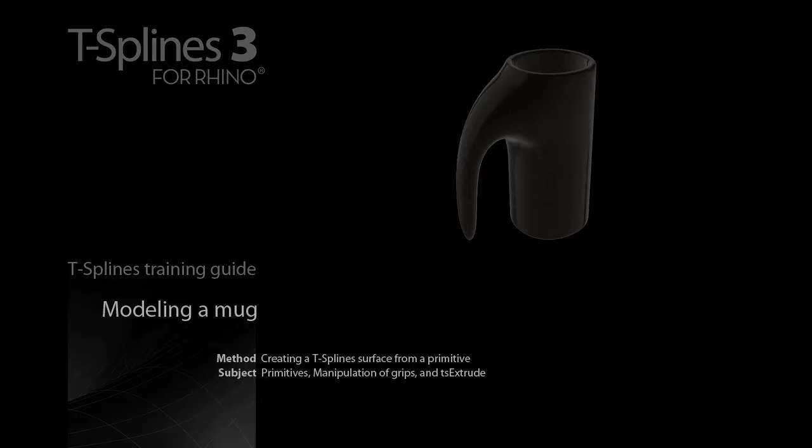Exercise 2, Modeling a Mug. In this exercise, we will again start with the T-Splines primitive to model a mug. We'll introduce one new command, the Extrude command. In this exercise, we are not starting with a reference image. We are going to treat T-Splines like digital clay to create and explore a shape.

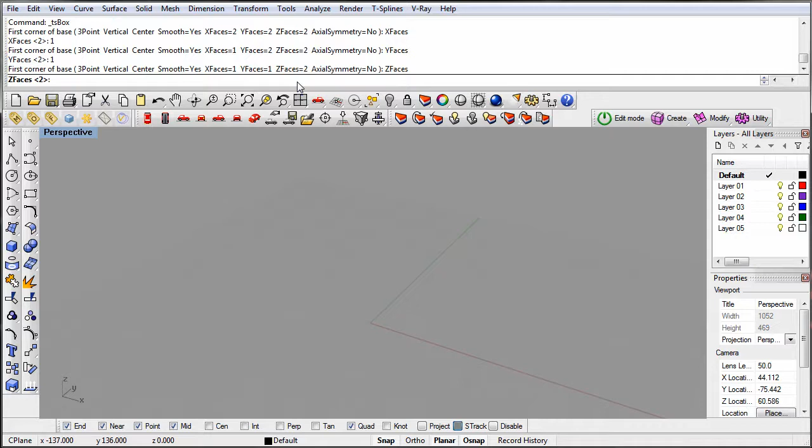We'll make a mug. We'll start again with the box primitive. Since the mug should be round, we don't need much detail in the X and Y directions, and we'll make one face on each of these. In the Z direction, we'll make 5 faces, and we will not use any symmetry.

With the remote control model, our primitive got us about 70% of the way there. It was roughly the same final shape as our design. We're not that far along with this mug. In this case, we need to make fairly substantial changes to our model to make the mug hollow and add a handle. We need to make large changes to the shape of the model. The Extrude command is a powerful basic tool.

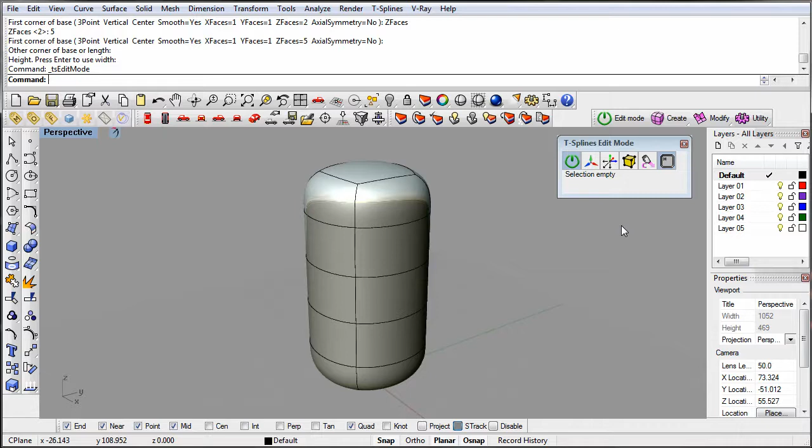We'll start by using the Extrude command to make the mug hollow. You can extrude faces, edges, and curves. We'll be extruding faces here. Just select the faces to extrude and run the Extrude command by clicking the icon or selecting from the drop-down menu. In exercise 1, we talked about the importance of the topology of your model when working with T-Splines. Again, the topology is the layout of the faces, edges, and vertices.

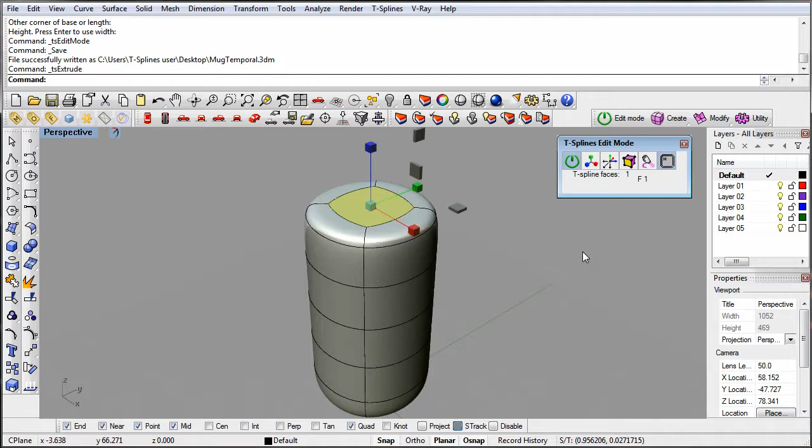We need to have a ring of faces to represent the thickness of the mug. So after we extrude, we are going to scale the new face inwards. This has the effect of making the outer ring of faces fatter. Next, we'll extrude the center face again. This time, we will move it downwards.

You can see that the farther we pull it, the more it looks stretched out. So we'll just pull it a bit and then run the Extrude command again. By doing this a couple of times, it helps the surface not seem stretched out and pointy. Looking back at the top of the mug, here we have a ring of faces that gives the mug the right thickness. This was because we made the original extrusion and scaled it in before making extrusions and pulling it inwards.

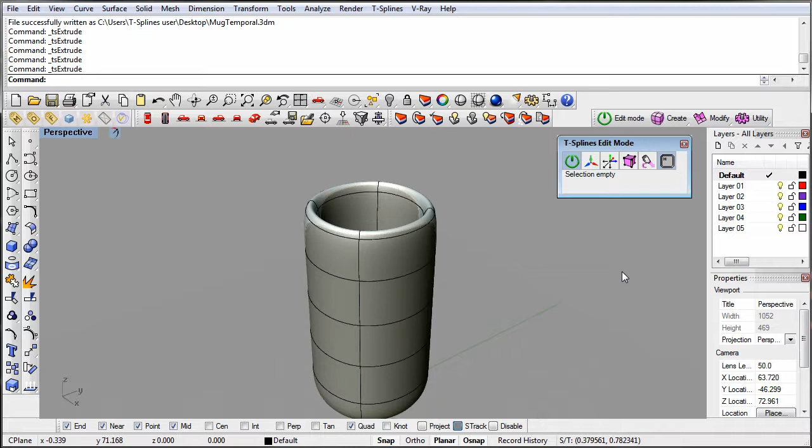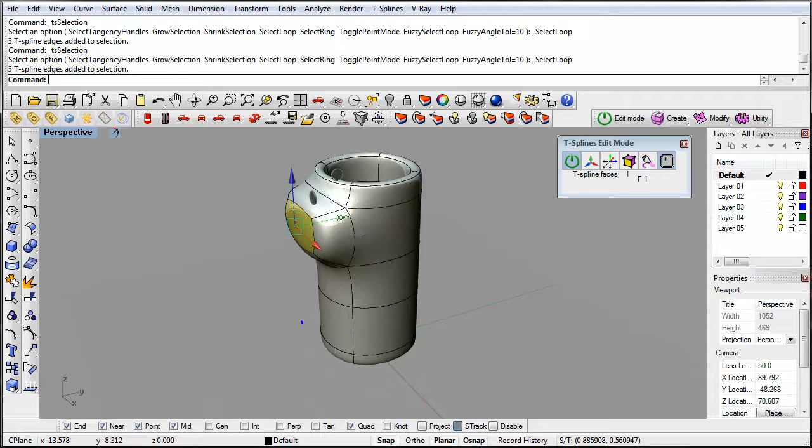To change the shape of our model at this point, we can move around the edges and faces and control points of the model. Remember, to make tighter transitions, we can move control points or edges closer to one another. Next, we'll extrude faces to make the handle of the mug. To do this, we will introduce a new way to extrude. Just hold down the Alt key and drag the manipulator. It will add an extrusion.

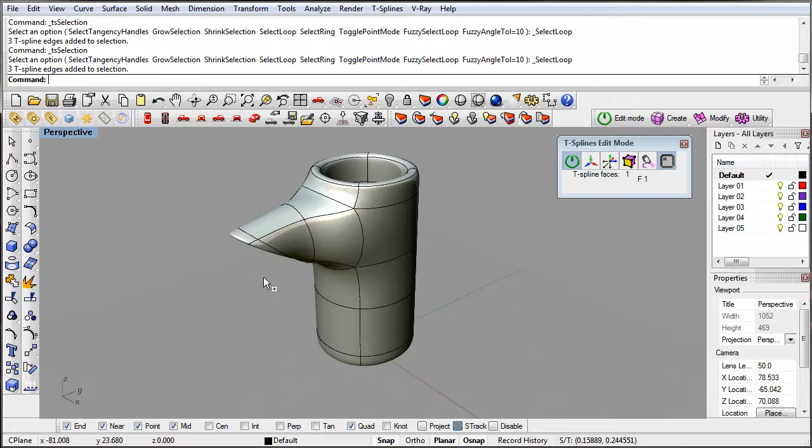As we're extruding the handle, we'll take care after each extrusion to tweak and shape the surface. This will involve some translating and scaling of the control points. Then we'll do another extrusion and move the control points again. We will do one more extrusion. This gives us our handle. Now we can tweak the surface and get the final proportions.

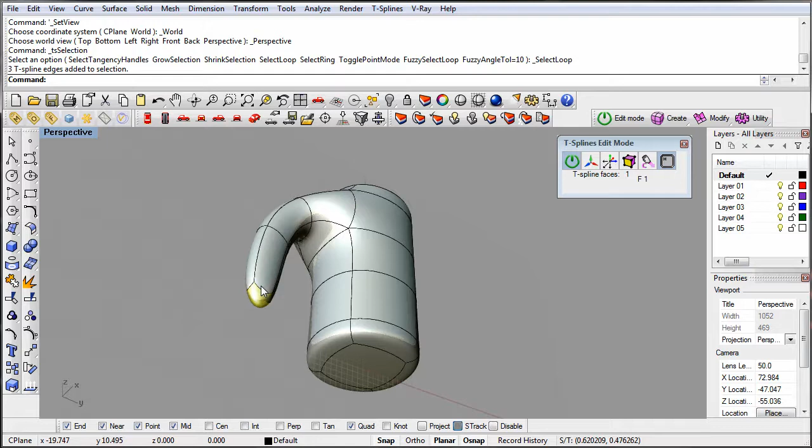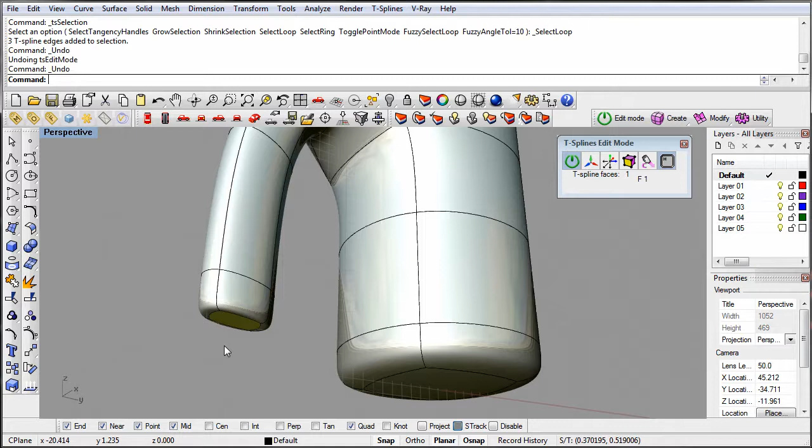Two important notes. 1. Undoing an extrusion. When you extrude, by holding down the Alt key and dragging the manipulator, you may decide you want to undo what you just did. You can do that with the undo command. However, one important thing to keep in mind is that you are undoing two operations, the movement and the extrusion. A very common beginner mistake is to only undo once. If you repeat that process, extruding and undoing, and don't undo twice each time, soon you'll end up with a bunch of control points stacked on top of each other, which is problematic.

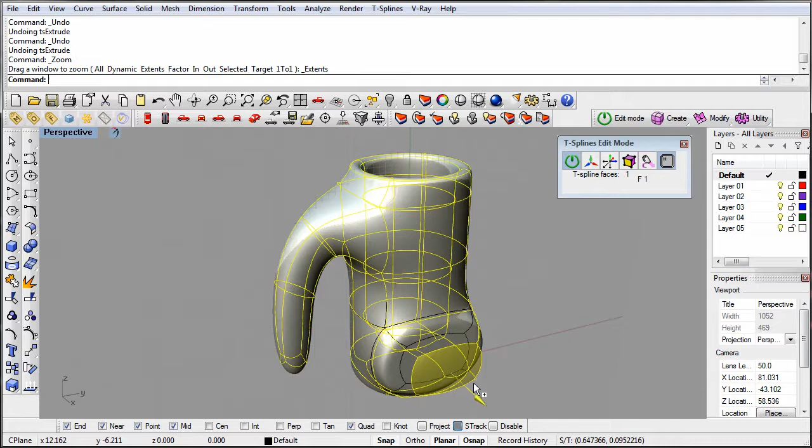The second important point, T-Splines as a unified surface. You'll notice that when you make an extrusion, the surface immediately next to the extrusion is slightly changed. And what you do with the extruded part will influence the original surface. This is by design and is one of the powerful parts of T-Splines, allowing your model to be one smooth, continuous model.